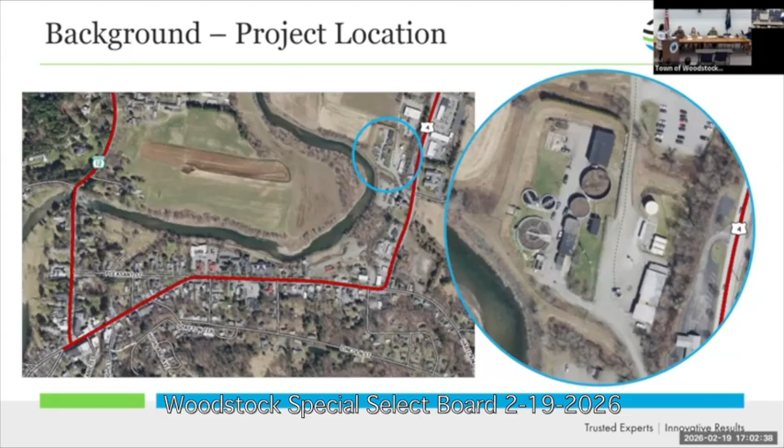So today we're here, Nicole Davis from Hoyle Tanner and Associates. With me, I have Kirsten DiPietro Warden, who is going to be speaking about the technical aspects of this project, and John Olin, who is a senior engineer for our team, and he'll be talking a little bit about the funding. So what we wanted to do was quickly introduce you to the site that the current wastewater treatment facility is on. Go ahead and click to the next slide. And then we wanted to give you just a quick background on the project itself.

So the project was originally constructed in 1968, and there have been some upgrades along the way, but there is substantial deterioration and aging infrastructure there. So we are looking to make some improvements. In 2023, we kicked off the preliminary engineering report process, where we studied the improvements that needed to be made at the facility. And then in 2025, we revisited that study, and we were able to make some research and investigation into some new technology that would be able to be implemented within that facility. Kirsten's going to talk a little bit about the aerobic granulated sludge process. So you're going to hear many times the word AGS, and that's what she's talking about. But with that.

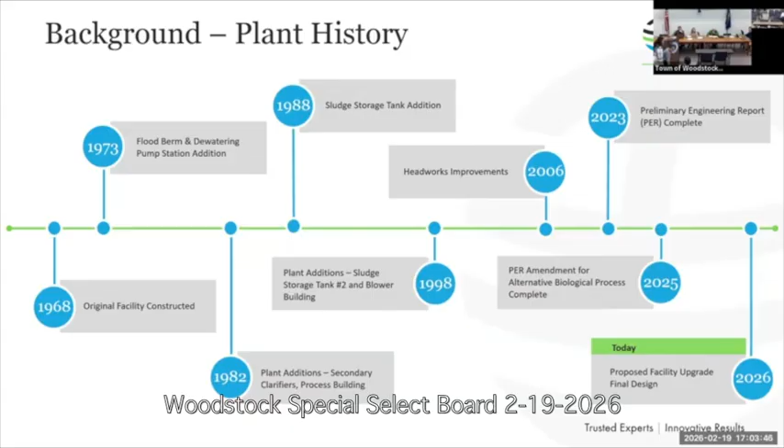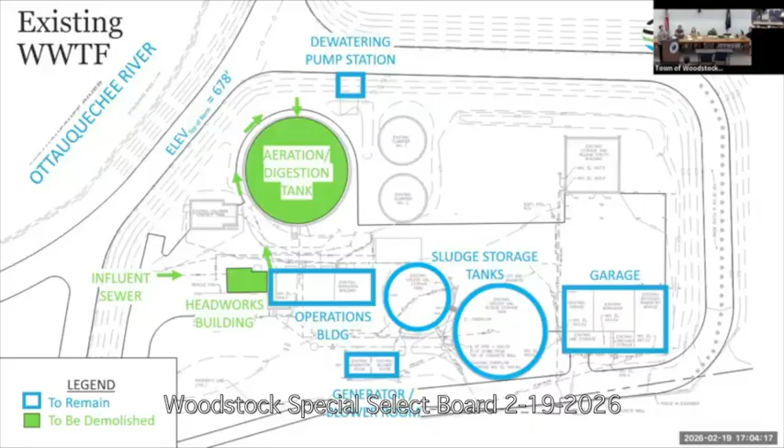Hi, my name's Kirsten DiPietro Warden. I'm the lead engineer for this wastewater upgrade project. I'm just going to bring you along our progression. So the slide you see here, this is the existing wastewater treatment facility. Click the next slide. So what you see here are structures that are going to remain in the upgrade and structures that are going to be demolished. The structures in green are going to be demolished. That's the headworks building, the aeration tank that has a sludge digester in the middle, the clarifiers, and the chlorine contact tank. What's going to remain is outlined in blue.

Now, why this is significant is because that's the main part of your process. It is where all the biological treatment happens in the aeration tanks and the clarifiers, and then disinfection happens in the chlorine contact tanks. When we did our preliminary engineering report, we assessed the existing conditions of the facility. And what we found is a lot of age-related deficiencies. We also found hydraulic deficiencies. So in order for your plant to meet your discharge permit for the next 20 years, we need to do significant upgrades to the biological process and to make sure that we can process the flow that is coming to the facility. You can go ahead to the next slide.

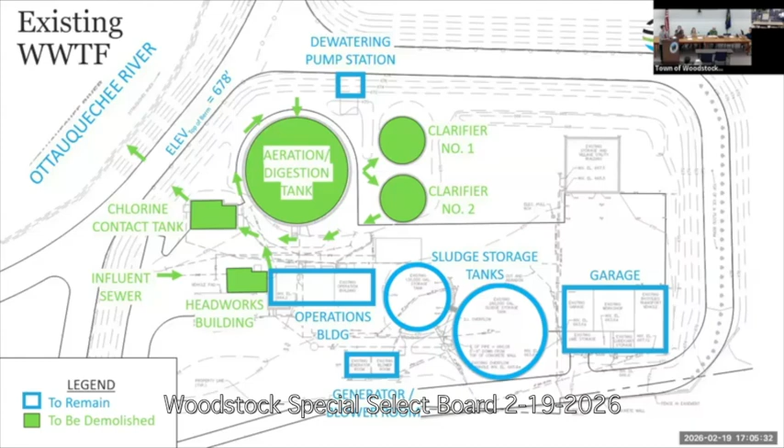So along those lines of aging infrastructure, what you see here is the headworks. The headworks is where raw wastewater comes into the plant. We have screening, that's an influent screen, and we have grit removal. This equipment was replaced not too long ago, about 20 years ago in 2005, 2006. This environment in the headworks is very corrosive. Hydrogen sulfide gases and other sewer gases lead to the corrosion of all ferrous, anything metal. So what you see here is severe corrosion on the equipment. You see corrosion of the building structure itself, lighting, etc. So in the new upgrade, this entire headworks building will be demolished and a new one will be built. You can go to the next slide.

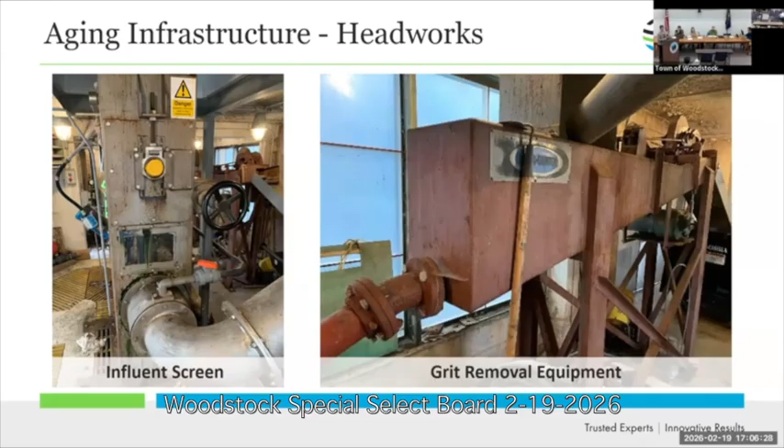This is the aeration tank, and there's severe steel corrosion that is happening. The image on the left is a structural beam that holds the divider steel wall between two trains. Right now, the operators cannot take the level down on one side to clean the tanks because of a potential for catastrophic failure of that wall. So they haven't been able to do the required maintenance that they need to do to maintain the aeration requirements for biological treatment, which is diminishing the treatment performance of this existing

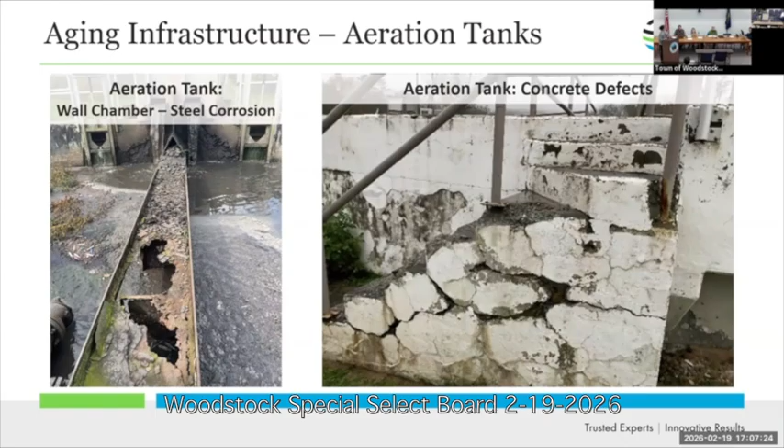aeration tank. The image on the right-hand side is just concrete defects. It's literally falling apart. We can go to the next slide. These are the clarifiers. Again, the photo on the right shows concrete deficiencies, cracking, which could lead to catastrophic failure. And then on the left, you see a corrosion of steel components.

These clarifiers are also not sized large enough for the peak hydraulic flows that the facility sees, which is a problem when you have an older collection system and you have inflow and infiltration into the collection system. When you see these rain events happen, you get a large flow that comes to the plant. So these are not up to standards that is needed for the plant. You can go to the next slide.

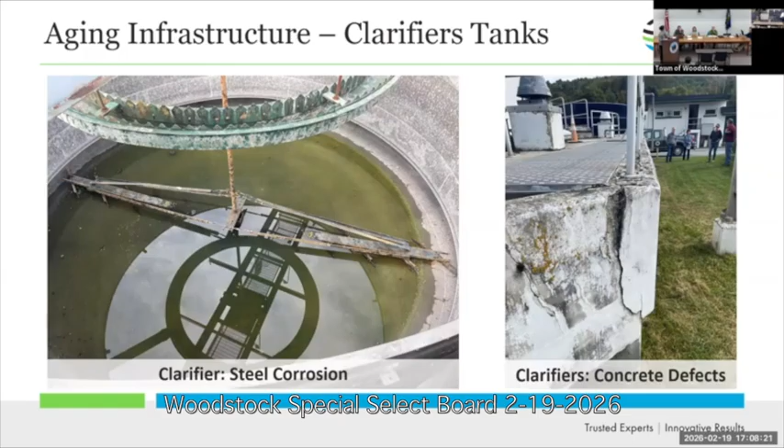Is that the right music you chose? I can't remember what it's... The soundtrack.

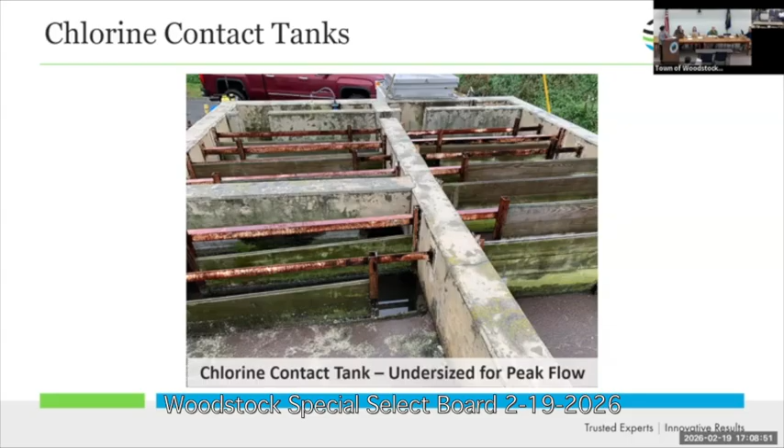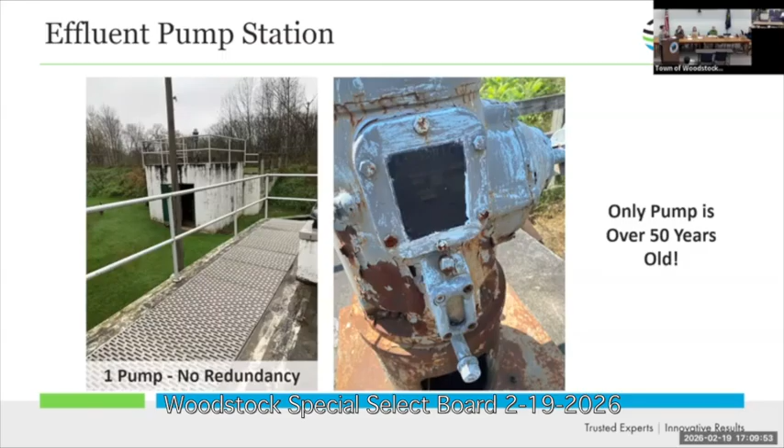So this is historically how that has happened during a flood, like a high water level at the river. It was built back when the berm was built in 1975, 1976. So it is over 50 years old. There's one pump, and it is that old. And it's amazing that it still works. So you can go to the next slide.

So the project need, aging infrastructure. I think I've demonstrated that there is a need there to replace this equipment that has corroded. It is at the end of its useful life. It doesn't meet design standards. It doesn't meet redundancy standards. That's a reliability issue for the plant.

If any of those things were to fail, the plant would not be able to meet its discharge permit limits and would be in violation and would put out a diminished treated effluent to the Ottaquechee River. It could be that it's too high in nitrogen, too high in phosphorus. It could be that it's not disinfected. So that's aging infrastructure.

Flood resiliency. Like I said, we're in a floodplain. There is an Army Corps of Engineers berm around it, but making sure that that effluent pump station can boost flows out of the plant during elevated river levels is important so that the whole plant doesn't flood.

Health and sanitation, again, if any one of those components were to fail, we would have undisinfected wastewater going out to the river, or it could affect the aquatic life in the river by too much what we call biological oxygen demand. It takes the oxygen away from the aquatic life in the river.

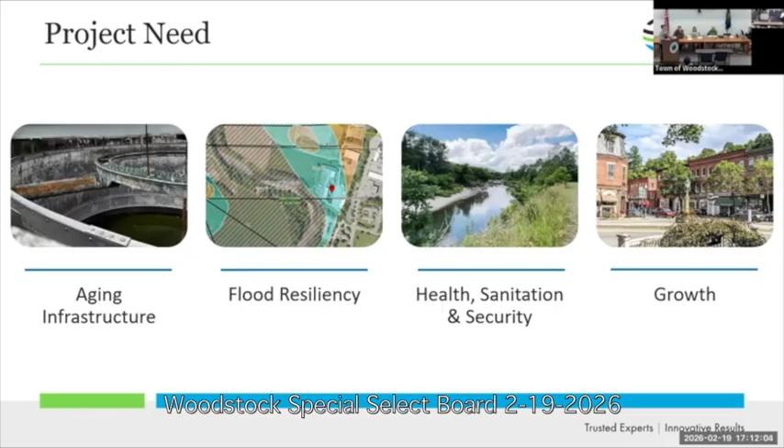And then for growth, for the town of Woodstock to be able to maintain its services, whether that is with restaurants, commercial businesses, if the town wanted to see a new brewery come into town, all of those things, by not having the infrastructure at your wastewater treatment facility that can effectively treat your wastewater, you could be in a situation where there's a moratorium on growth in the town. So those are the project needs. You can go to the next slide.

So what Nicole had alluded to, we did an amendment to the preliminary engineering report to look at some alternatives, different biological treatment alternatives. And the one that ended up being selected, recommended and approved by the board here is called aerobic granular sludge. And this is a newer technology here in the United States, but it's not new globally. This is a process that's been developed in Europe and has been implemented quite successfully in Europe and is starting to be implemented here in the United States.

There's probably about, I would say, 30 to 40 installations. It is truly going to be the way of the future for biological treatment. So what is AGS? AGS is a granular sludge that forms based on, I'm going to try not to get too much into the weeds here, but forms based on a longer detention time of your sludge. It just builds and it grows that granular sludge. So you are operating at a higher mixed liquor suspended solids.

And by doing that, the cross section of the granule, you have the ability to have an aerobic zone on the outside where nitrification happens. The next layer in, which is kind of like the purpley layer, is where denitrification happens. And then the inside, the anaerobic zone, is where phosphorus is removed. So you can have simultaneous nitrification, denitrification, and phosphorus removal all in one granule.

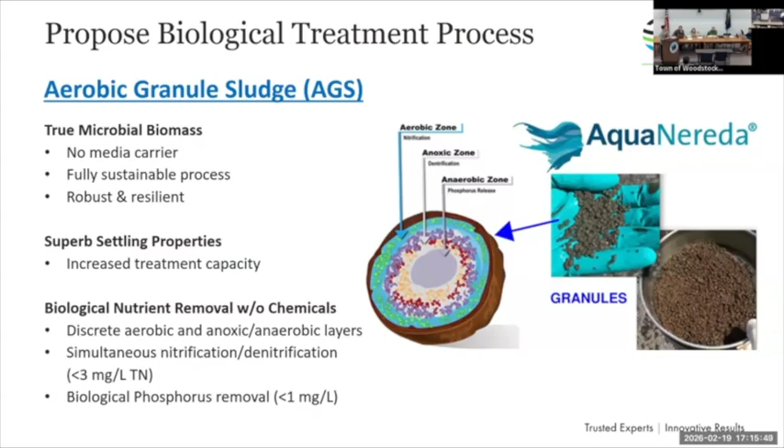So just to tout its performance, it has those discrete layers, anaerobic, anoxic, and aerobic. It can do simultaneous nitrification and denitrification to less than 3 milligrams per liter of total nitrogen, which is phenomenal. And biological phosphorus removal without chemical addition down to less than 1 milligram per liter. So these are some of the attributes. Actually, we can go to the next slide because there's more. Nope. Okay, that's fine. We'll talk about this.

So this is a great example. At the public tour, we had the sample on the right. That is the existing sludge; the operator went to the aeration tanks, took a bucket, and we put it out. That is what we call a mixed liquor. Okay, that is the existing sludge from the plant right now. The one on the left is the AGS sample, which the manufacturer's representative brought with us.

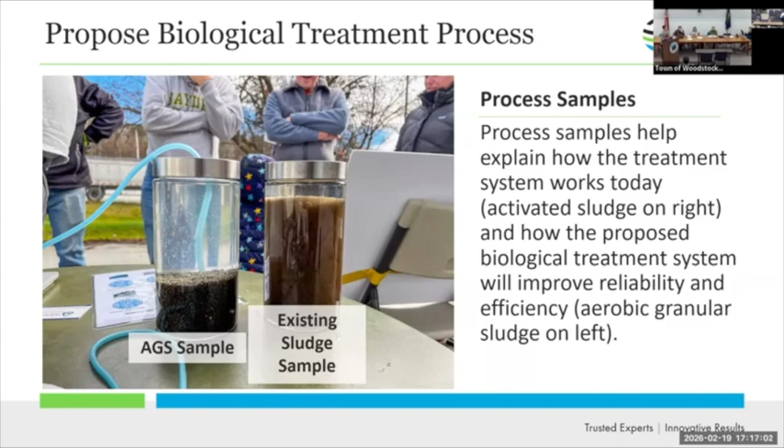He had a little mixer in there and he had it all suspended for a while, but then he turned the air off. And that's what it settled to in a matter of seconds. The one on the right, the existing sludge sample, never settled. So that's the difference in the sludge types by growing it into these granules. And that's how you get a more reliable biological process. It's much more efficient. You can go to the next slide.

So some of these attributes, we have it all in. We're going to do a batch cycle. You can adjust the batch sequencing and the cycle time based on your influent flow. So it's very adaptable. If it's low flow times or high flow times, we can adjust the cycle to match that. All of the treatment is happening in one reactor. So for our plant, we're going to have two for redundancy.

It's 15 times the settling of conventional activated sludge, which you saw just there in the sample of the two different kinds. The biomass is self-sustaining. You don't have to add chemicals to it. You don't have to do anything to it. You just let it grow. It's an enhanced, the top center, enhanced BNR, that's enhanced biological nutrient removal.

That was nutrient removal, being nitrogen and phosphorus, without chemical addition. It's a very simple operation. Again, it's a batch process and it's not complicated for the operators to keep tabs on. It's not like they have to constantly adjust airflow rates or recycle rates or internal recycle rates. It's not a complicated process.

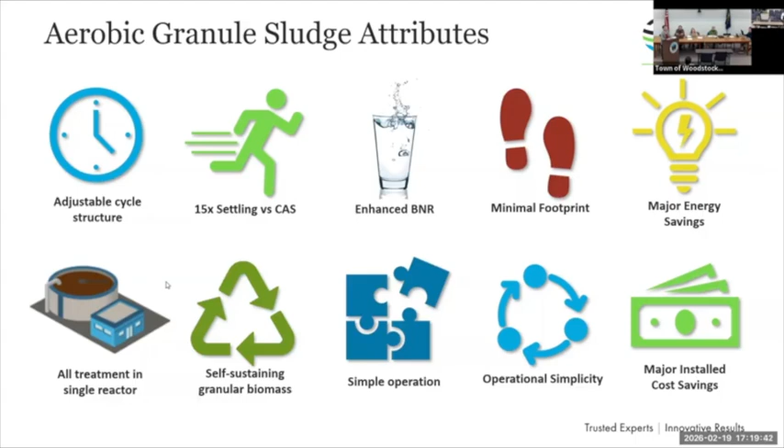We're going to change the disinfection at this plant from chemical-based disinfection to UV ultraviolet disinfection. And then a Parshall flume is for flow measurement, and then out to the river. Solids are wasted out of the aerobic granular sludge tanks to sludge holding. And from there, that will be dewatered.

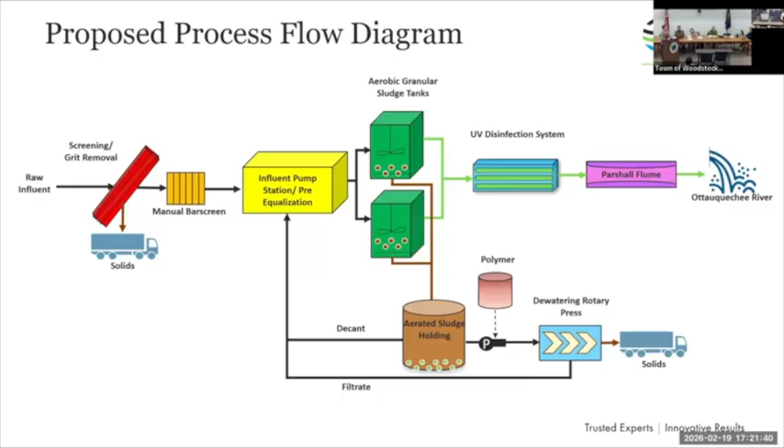There will be a process building in between that'll house blowers, pumps, controls. We are putting a backup chemical feed system in there. It is for assurance. If something is to go wrong, it's always a good idea to have a backup system if the biology requires it.

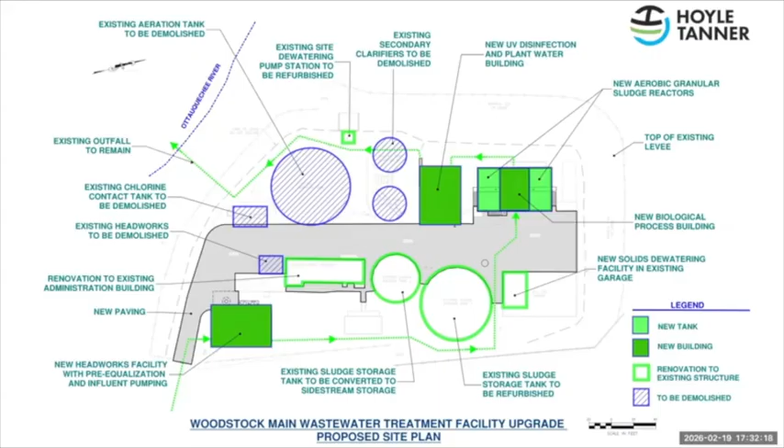Okay, thank you. The second question is the Army Corps of Engineers berm, does that go under regular testing and maintenance to keep a certain standard of protection for the plant? The berm was built by the Army Corps of Engineers back in the 70s, but it is owned by the town. We are not doing anything to the berm. We're not putting any new pipes through it. As far as we know, the berm's structural integrity is intact.

If I may interrupt for a second, I think it might be best if we let Kirsten finish the whole presentation, and then ask questions at the end, if that's okay with everyone, so we get through the presentation. Thank you.

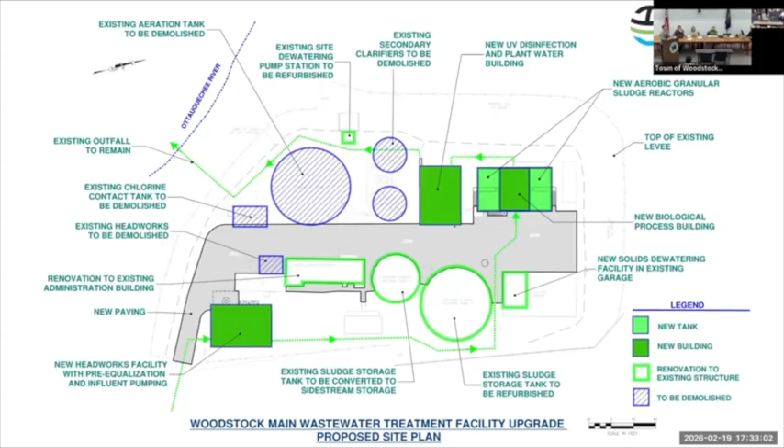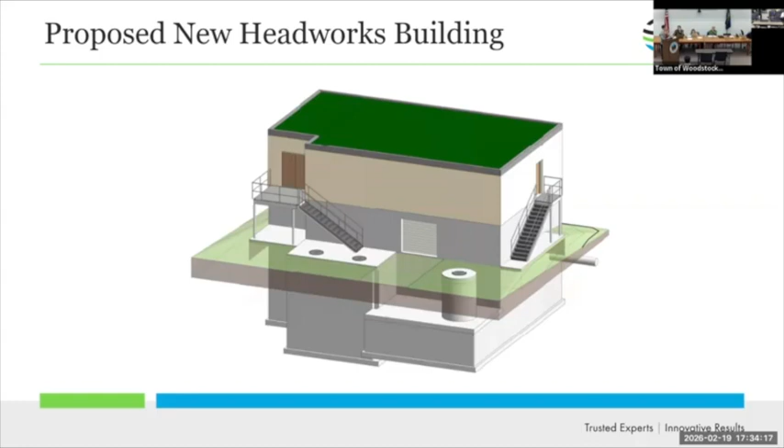The thing to note here is we are designing these to be protected against the 500-year flood event if one were to hit Woodstock. There are design standards through the state of Vermont that you need to treat up to the 100-year flood elevation. So you will have treated effluent up to that point, and you protect up to the 500-year. You'll see a lot of stairs up into some of these buildings, and that is a foot above the 500-year flood elevation. You can go to the next slide.

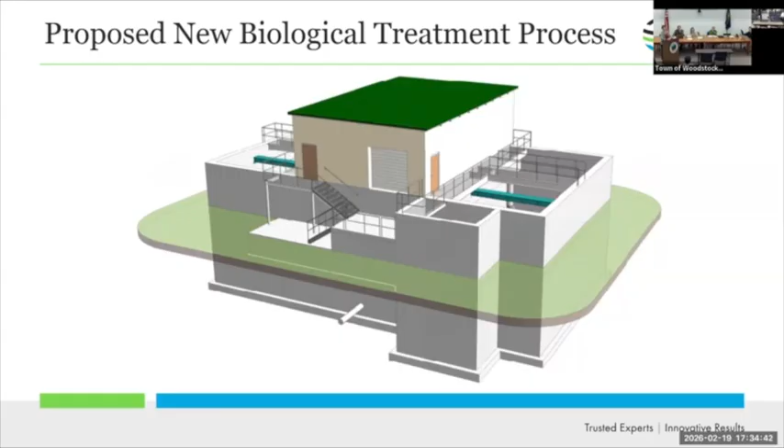Okay, so thank you, everybody. John Owen here to talk about the funding portion of that. It was a great presentation, Kirsten. I always get excited to hear more about AGS and to go home and tell my wife and my family and my friends all about it. So hopefully you do the same.

I want to point out to the question about operations. Part of the step one, that preliminary engineering report, we work really closely with the operators, the ones who are going to be taking over. It's not just about the cost, it's about their day-to-day life, how they perform their jobs. And Kirsten does a great job of working with the operators to make sure they're happy with what they're going to be having to manage afterwards for the next 30 years.

So we've completed step one, preliminary engineering report, and you'll see it come up as PER a lot. That's our short term for it. We've begun the funding agency coordination and the applications. We had the public tour in November of 2025. Hopefully, if some of you were there, it was a great tour. It was a great day out there. The video is not posted to the website yet. You saw it come up in some of the pictures right before the slide.

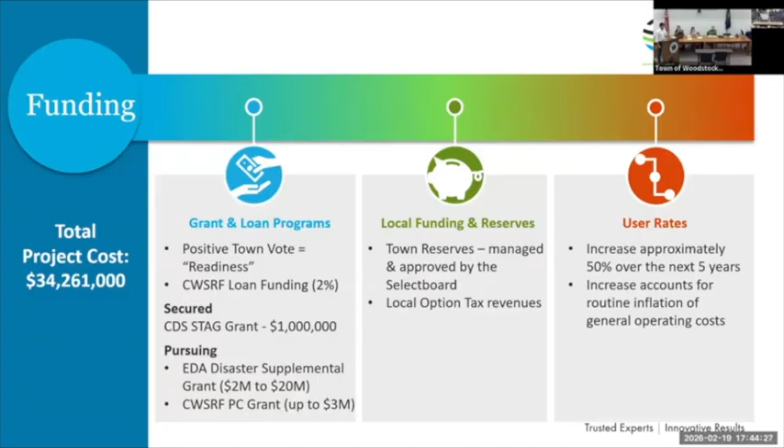Okay, I think we'll go 2 slides ahead now.

This investment benefits the entire community by protecting the water quality of the Ottauquechee River, supporting housing and economic growth, and ensuring reliable infrastructure for decades to come. That's my closing statement on the project, and we will open up to questions and do our best to respond.